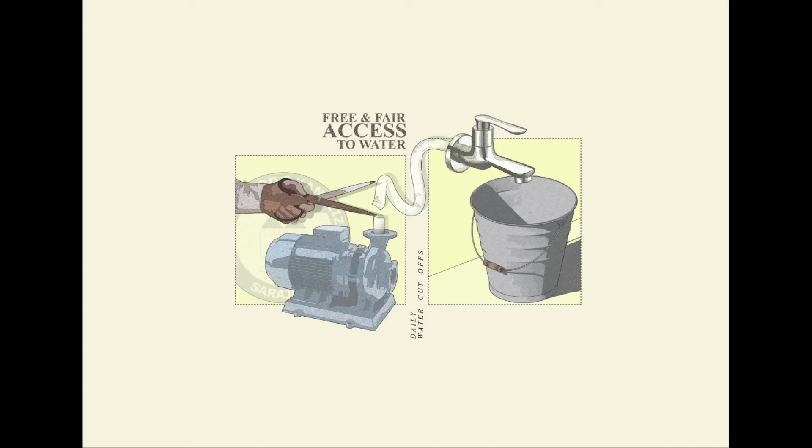Cut-offs in the water supply are regular and are mainly prioritized for industrial and construction projects in the city as the crisis ravages the residential zones. This has greatly angered the public.

The city's glorified natural water resource, the Miljacka, is a river that cuts through the city but is polluted and is flooding as months go by. The city's wastewater drains directly to it, and the only wastewater treatment plant, damaged and looted during the siege, is inadequate to address growing demands of clean water provision.

150 million euros in EU grants offered to the Bosnian government to address the crisis are to date unaccounted for, further fueling both political and social unrest in the capital.

For a nation visibly split amongst political allegiances and ethnic issues, a water crisis is bringing people together, but subsequently not healing this shared wound.

What were once even social norms, such as competitive diving, swimming, and sunbathing that flourished along the Miljacka, are slowly dying out. For a city whose past has intertwined its people with its iconic river, conversations about water futures in such a crisis haven't been as poignant and as serious as ever before.

Hydrosocial Futures examines an intertwined socio-natural process where water and the community make and remake one another, in an exploration and curation of resilience for post-conflict Sarajevo.

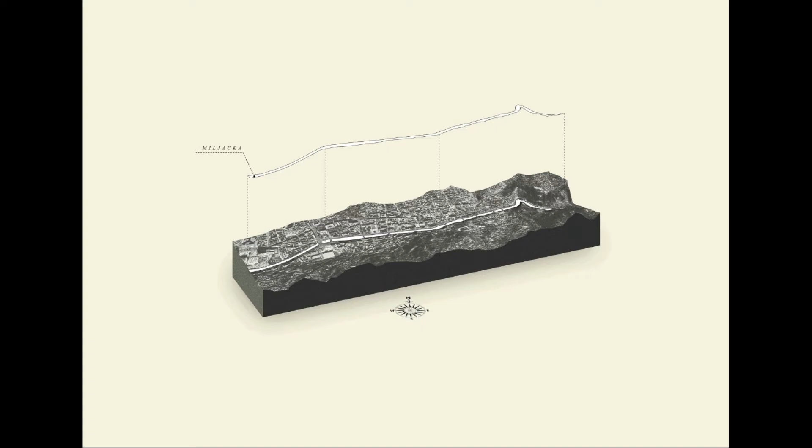Mapping the Miljacka is introduced as phase 1 of this hydrosocial future. It entails a more holistic view of the river as a living, breathing organism at first, and it is viewing it as a social infrastructure comprised of the bridges that are mapped along it with their historic narratives, the existing water supply network, and the city in perspective.

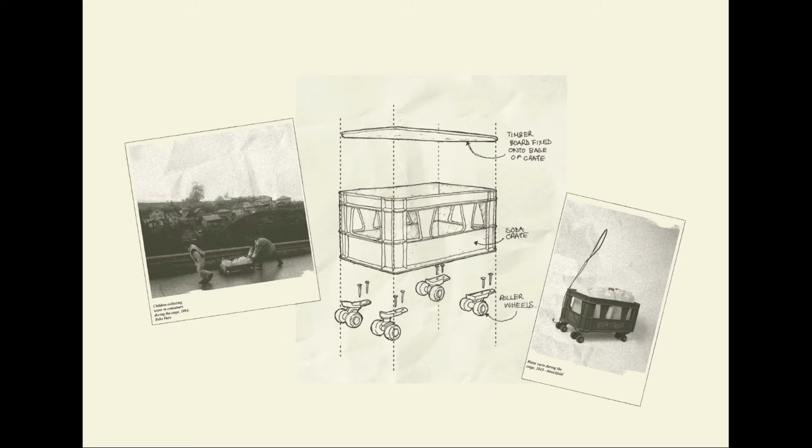Starting this exploration at a smaller scale, I examined the water cart as a siege-time resilient object in the water crisis of wartime Sarajevo. This led to a development of my own future resilient object, borrowed from the same siege-time narratives, a task that later prompted me to first map out both the past and future of Sarajevo's water crisis against that of the world.

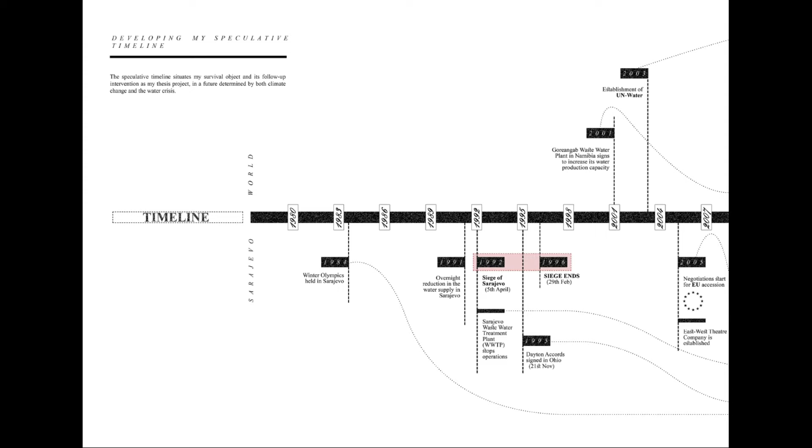The product is this timeline of the hydro crisis, predicting a future in 2030 when the rising Miljacka waters are a flood threat and the Sarajevo municipality, in conjunction with the UN, pushes for a small-scale cleanup exercise of the river.

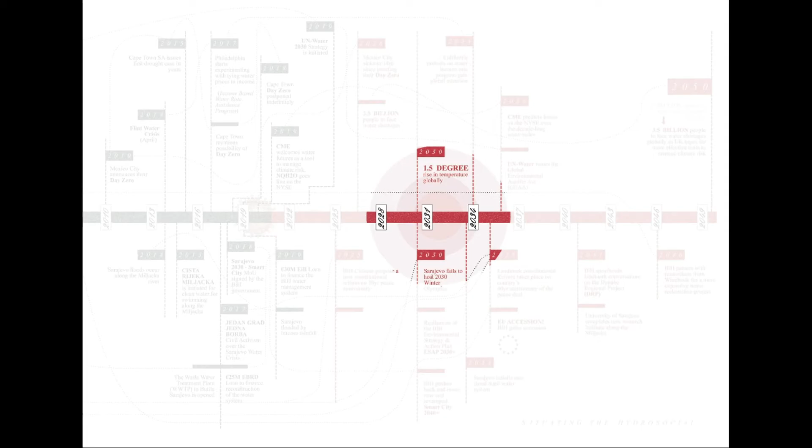Staged for now resilient 2031, the Miljacka Cleanup Protocol is born, an AI-based program cataloging the ever-changing river, tracking both the pollutants and biodiversity present.

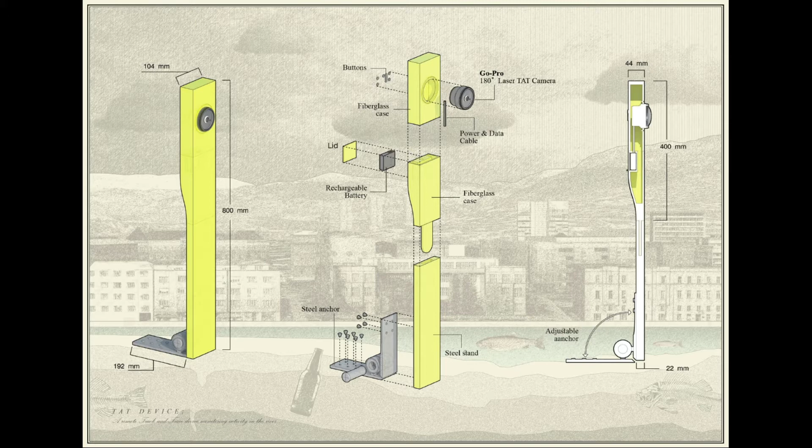Predicted rise in water levels, the extent of pollution, the range of underwater species present are all recorded by the MCP program. It makes use of a sophisticated track and trace device to scan the river and feed live data straight to the MCP database, facilitated by an MCP software accessible on all Windows, Android, and iOS devices.

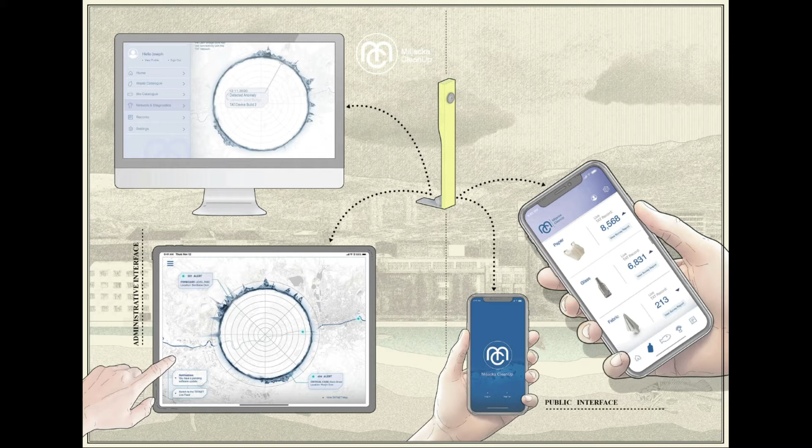As a buildable prototype, I tested out my future resilient object back at home on a 1:1 scale at Sheffield's River Don, with the overarching idea that we could map the biodiversity and the pollutants present in the Miljacka River.

Phase 2 is examined on a building scale, the Hydrosocial Master Plan, a sustainable alternative water source for the people and a call for a city more engaged with its river, frames the brief for a center that supplies free filtered water from the Miljacka and reinvigorates social activities along its banks.

It starts with restoring and reintroducing the Bentbaša diving competition, the city's first hydrosocial activity.

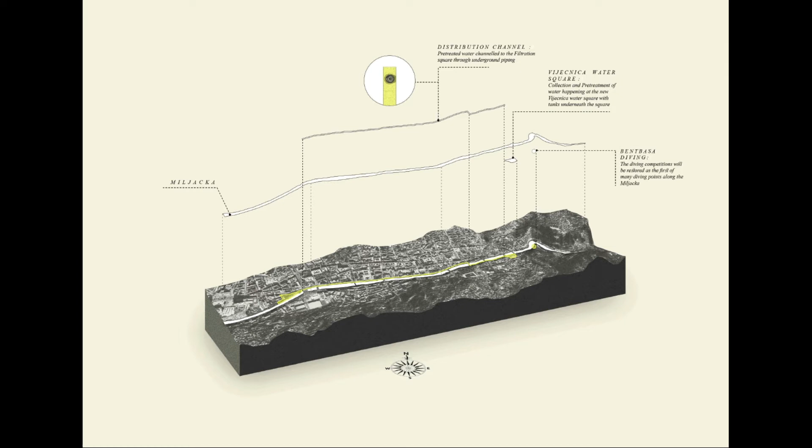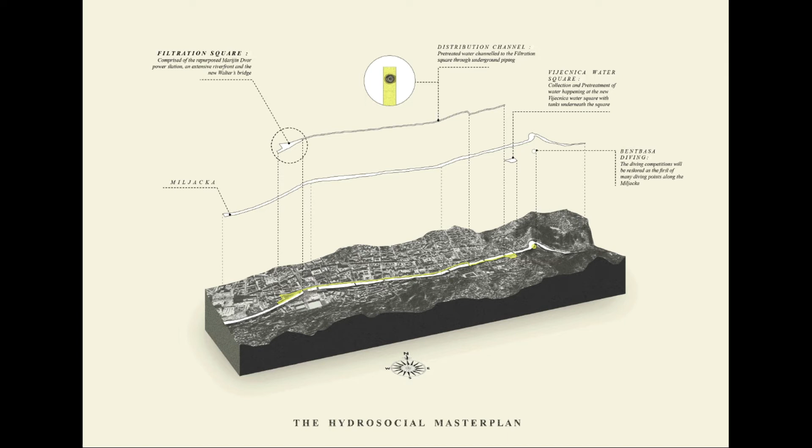The old and derelict Walters Power Station at the heart of the city welcomes the later stages of filtration and will serve as the public's first ever filtration square, an idea that was heavily inspired by site-specific hydrosocial narratives.

This abandoned power station that is the glory of the city inspired the narrative of breathing new energy and life into it, one of fluid power.

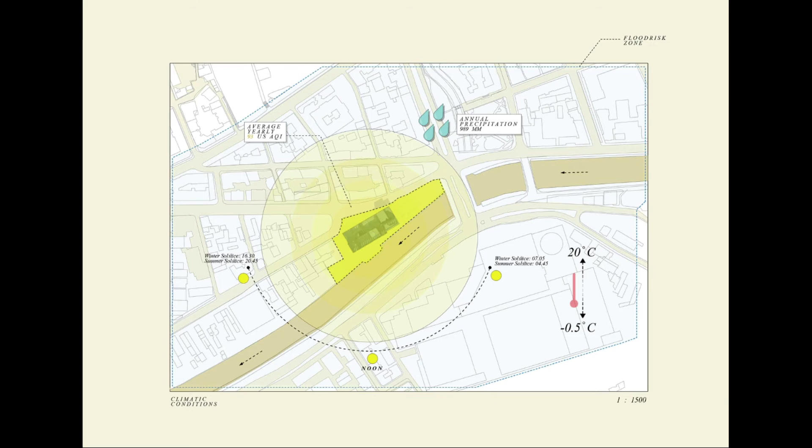The site is within a flood risk zone of the Marijin Dvor area of the city. The site program entails an adaptive reuse of two listed buildings on Walters Power Station as the filtration hub and the administrative hub. An extensive riverfront will form part of the sitescape.

Walters Bridge, purposed for generating sustainable hydropower energy, is one of the few hydropower bridges proposed along the Miljacka, and further doubles up as an additional diving point.

As the water now enters the site, holding tanks help regulate the inflow, channeling it to the filtration hub. Filtration then resumes inside the coagulation, flocculation, and sedimentation tanks.

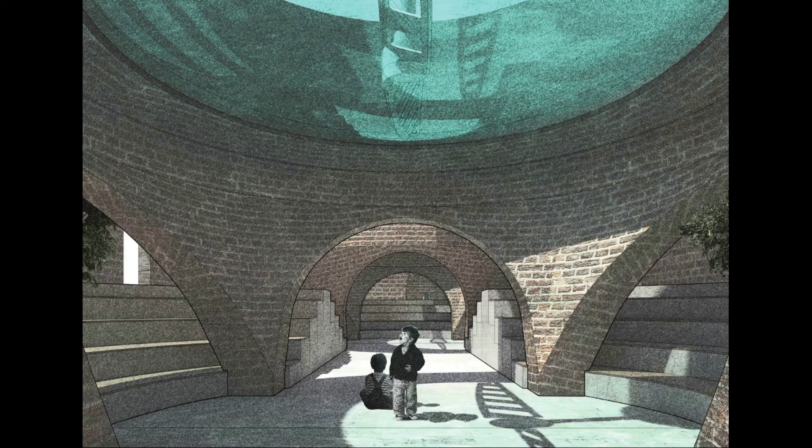These filtration chambers, unconventionally raised above ground, offer an intimate and educational experience for the public, highlighting and making visible the occasionally hidden parts of the filtration process.

Not only is it part of the primary access through, staff are welcome to hold constructive discussions underneath the glass bays and the brick arches.

As the sediment from the filtration is collected in a sludge dewatering station for drying, the water is filtered further through a phytopurification pool, naturally, and disinfected before it's considered safe for drinking.

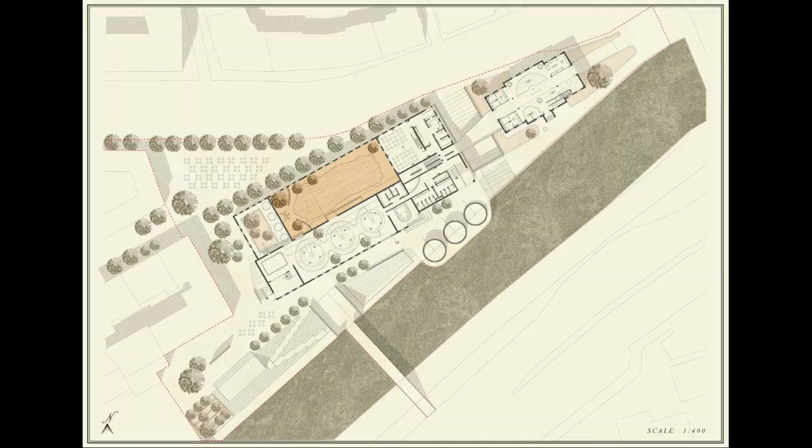At the Civic Forum is where the filtration terminates. A targeted capacity of 19,000 liters of water is filtered per day here.

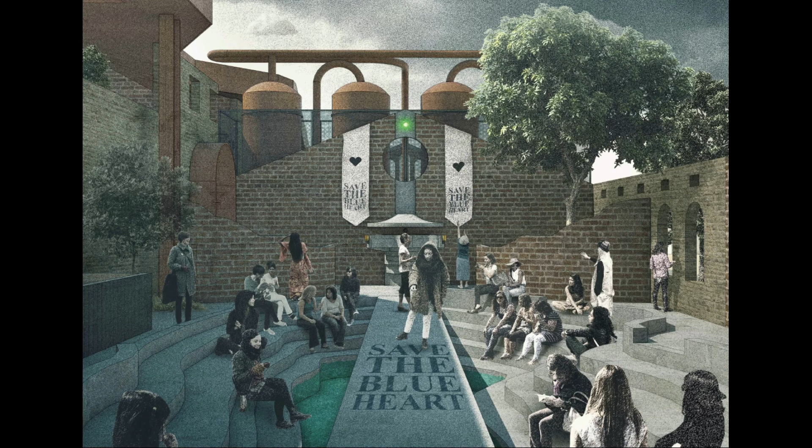To collect your free water, an elaborate water tap at the rear end is approached across a central bridge within the Civic Forum. A green alert on an autumn noon signals an ongoing protest within the forum about saving

the last wild rivers of the Balkan region, while on an afternoon in warm summer, an amber alert signals that the Civic Forum has welcomed the flood and has now become the city's public pool.

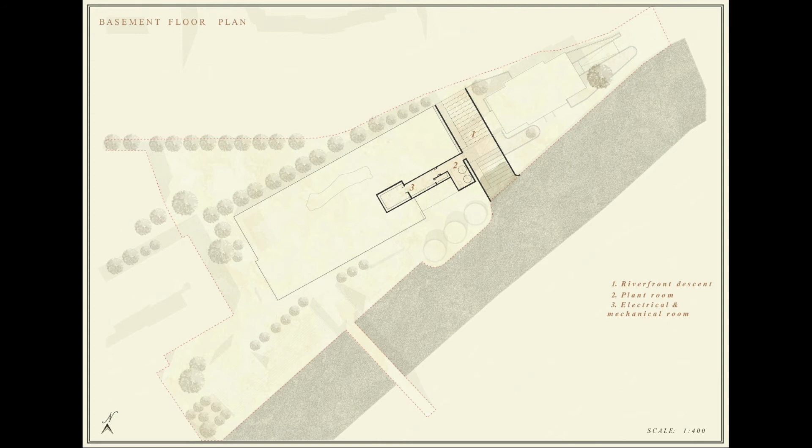The ground source heat pump, located at the basement service chambers, provides sufficient heating for the building and for the pool. Learning spaces now on the upper floor and within the administrative hub cater for research work.

An accessible footbridge on the second floor offers an elevated look into the filtration hub and is also purposed as staff access for maintenance work on the filtration chambers.

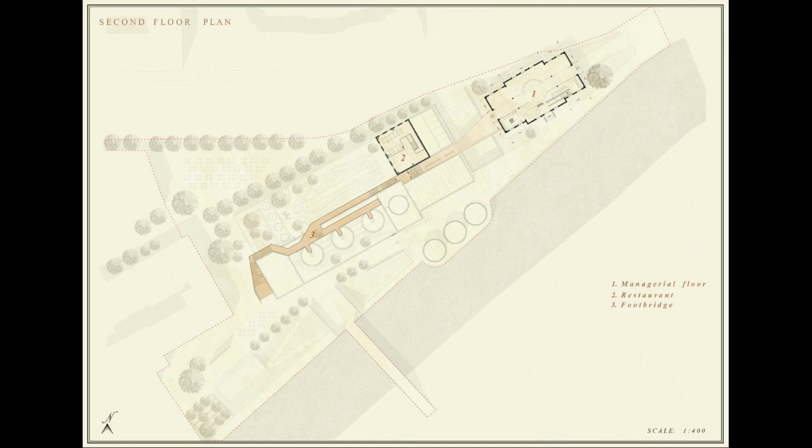After having collected my free water, the exit past the sludge dewatering station confronts me with the sediment residue that was left after filtration. A clear reminder of just how dirty the river water is.

It is dried in portions, ready to be packaged as dry soil or compost for construction or local farming.

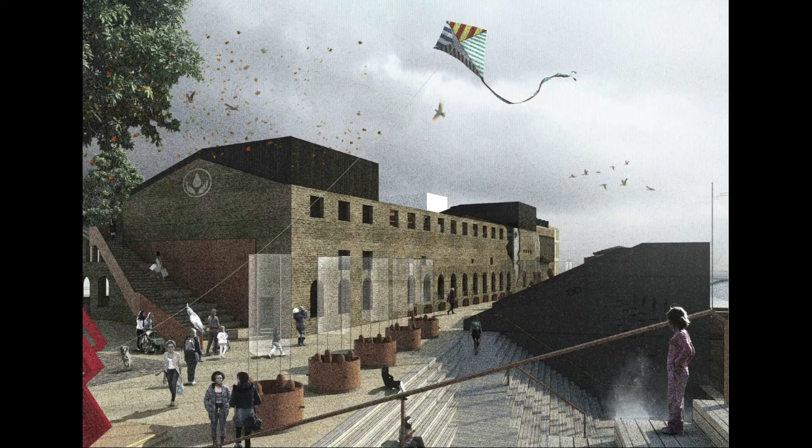Once outside, the riverfront that was once a parking zone is lively again, bringing the public a little closer to the Miljacka waters. Walking across the bridge, staff from the MCP are installing new track and trace devices, whilst

a couple of locals are jumping off the diving platform into the clear waters of the Miljacka. Long-lost hydrosocial habits that once brought life to the Miljacka are introduced back again.

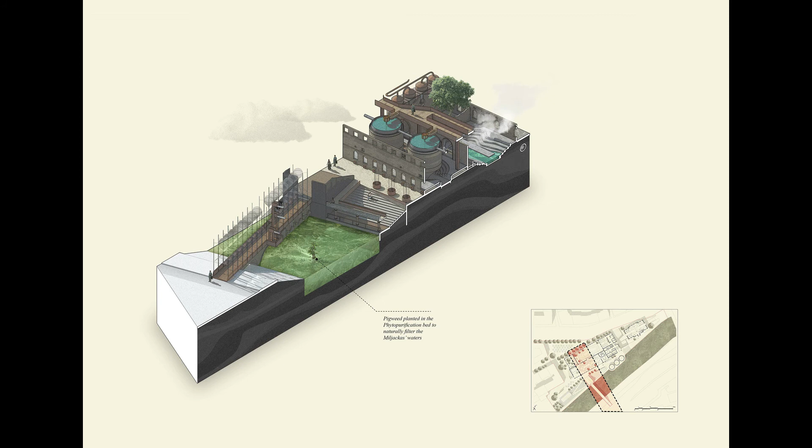In this age of climate change adaptation, welcoming the flood is one of the specific sustainable principles embraced as a bold and ambitious design strategy for the site. The new build retrofit spaces are proposed at 900mm above the flood risk zone on the site.

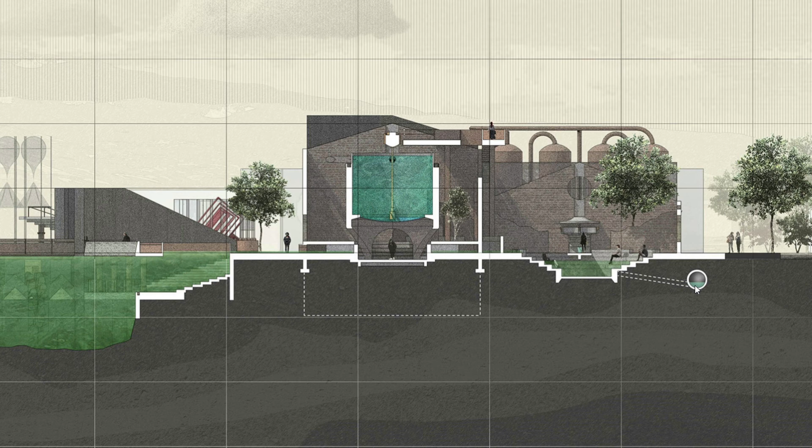This creates a cavity through which the river waters pass through to flood the civic forum. Any excess flood water is then channeled away from the city and site for stormwater collection.

This cavity, in other enclosed spaces, accommodates a thermal labyrinth for natural ventilation and night purging.

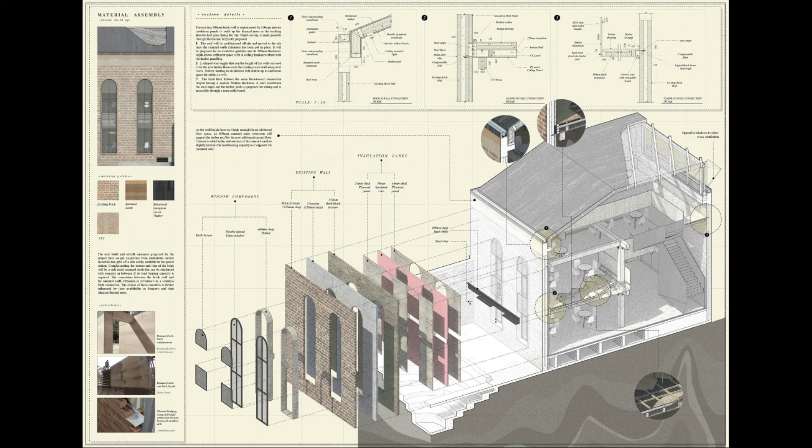Adaptive reuse is another sustainable strategy focused on how the new build retrofit ties in with the existing heritage building fabric, influencing further the choice of earthen materials such as rammed earth, CLT, and brick.

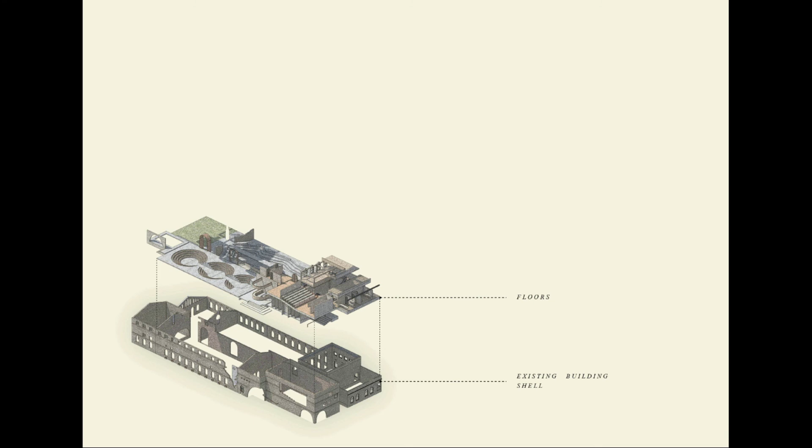As a building composite, these component layers of the floors and the filtration process are carefully tied into one complex building that, when situated now within the grander picture of this master plan, complement the early visions of Sarajevo's

hydrosocial future. Walter's Bridge, the filtration hub, and an extensive riverfront paint the picture of one of the few initiatives dotted along the river. The filtration square, now actively hosting diving competitions prior to Sarajevo's Winter Olympics, engages the river

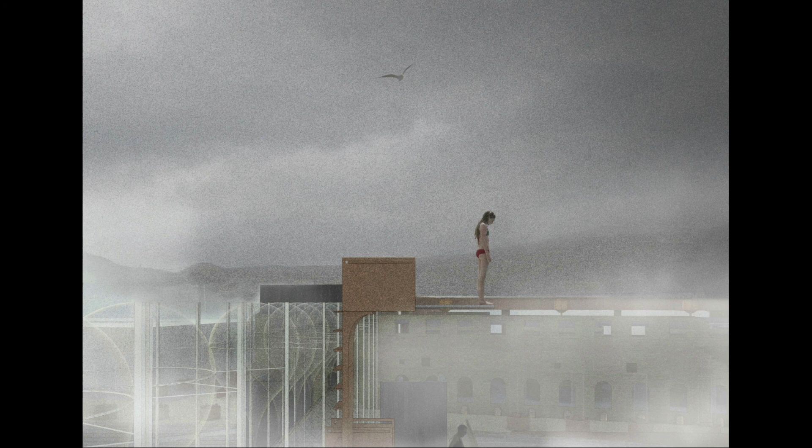once more with the locals. In a cry for political reform in 2035, at a time when the nation itself seeks accession into the EU, this extensive hydrosocial plan will heal the shared wounds of a water crisis, bringing both different ethnicities and political parties together as one. Sarajevo becomes a now pioneering instigator and a successful example of a new form of resilience, hydrosocial